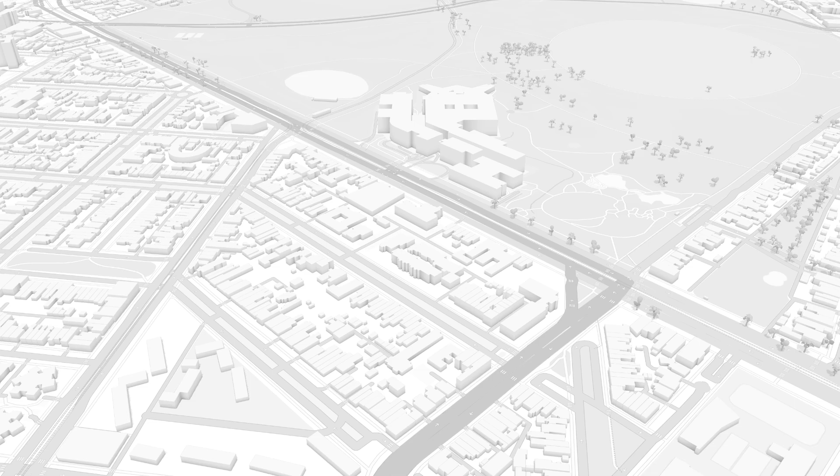On Flemington Road, there are existing pedestrian crossings. Let's call them A, B, and C. The distance from A to B is 137 meters. From B to C is 300 meters. Based on research, 50% of people refuse to walk more than 60 meters out of their way to use a formal crossing. At 300 meters, the gap between B and C is 5 times that threshold.

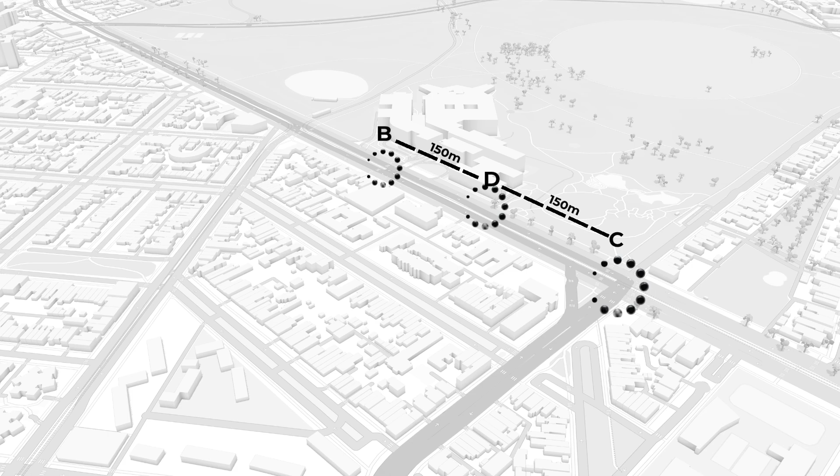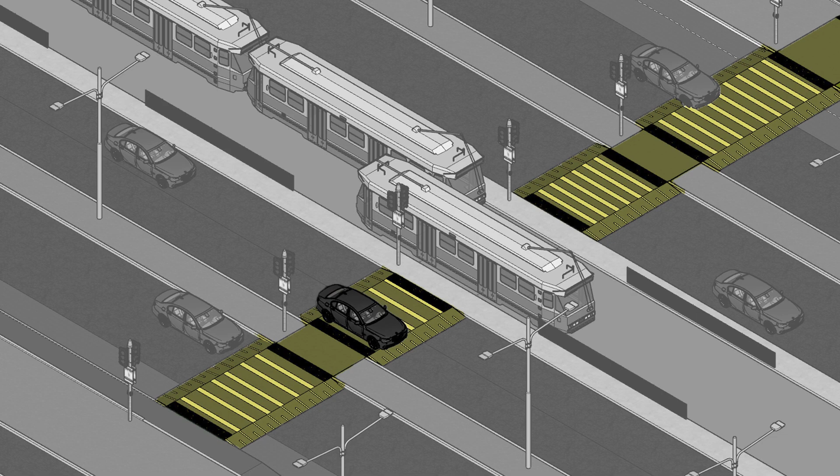In response to this, we propose a new crossing to reduce the gap from 300 meters to 150 meters, and to maximize safety, the crossing is designed as a wombat crossing. A wombat crossing forces drivers to slow down to 30 km per hour, compared to standard crossings in a 60 km per hour speed zone. If an accident happens between a car and a pedestrian, the pedestrian struck at 60 km per hour has an 85% fatality probability. When the same thing happens at a wombat crossing, the fatality probability drops to 10%.

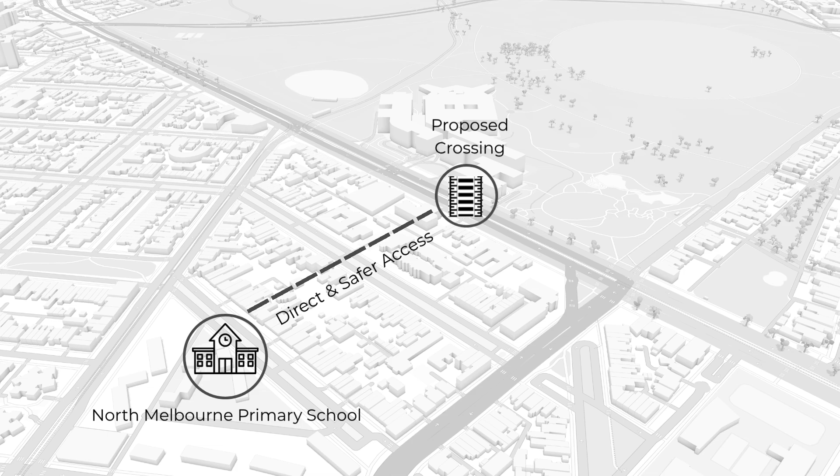We also propose a new pedestrian-only street that creates a more direct and safer connection between North Melbourne Primary School and the new mid-block wombat crossing on Flemington Road. To evaluate the safety of walking routes with our proposal, we use the Pedestrian Route Risk Score, or PRRS.

The PRRS is measured by combining 4 factors: pedestrian exposure time, which measures how long children are exposed to traffic while walking, waiting, and crossing the roads, calculated using children's walking speed of 0.9 meters per second. Vehicle conflict rate, which measures how many vehicles pedestrians encounter during their exposure period. Uncontrolled conflict points, which measure the level of crossing protection, where uncontrolled crossings carry higher risks while safer crossings receive a lower risk point. And then road severity weight, which measures the relationship between vehicle speed and crash severity.

The first route is from school to or from the Route 59 tram stop, showing a route risk score, or PRRS, of 22.98 points. The new intervention with the same destination and starting point reduced the PRRS to 13.78. And if we compare them, the PRRS reduced by 40% from 22.98 to 13.78.

The second route is between school and Royal Park. The existing route shows a route risk score, or PRRS, of 40.57, and the new intervention reduced the PRRS to 20.03 points. The new interventions show the pedestrian route risk reduced by 50.6%.

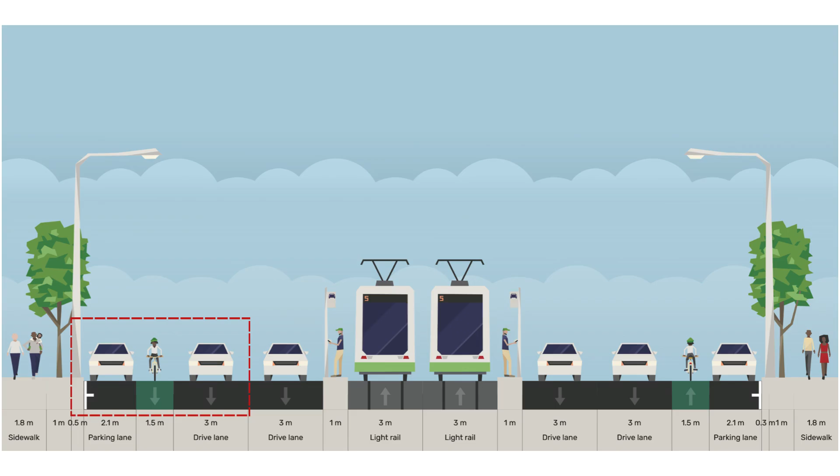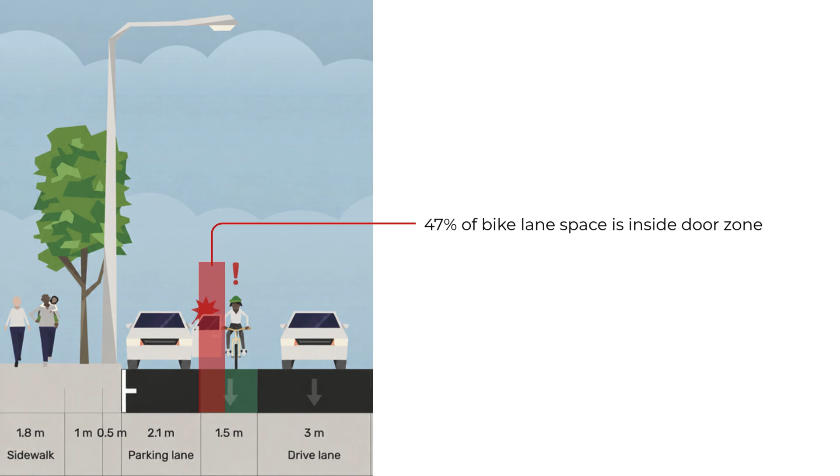The intervention analysis before focused more on pedestrians, but on Flemington Road, where most crashes occur, we found another problem that can affect the safety of cyclists. On the existing road, the bike lane sits between 2 threats: cars parked on the street and moving cars at around 60 km per hour. 47% of the 1.5 meter bike lane is inside the arc of an opening car door, leaving only 80 cm of safe riding space, giving an 18.1% chance of conflict and 85% risk of fatality.